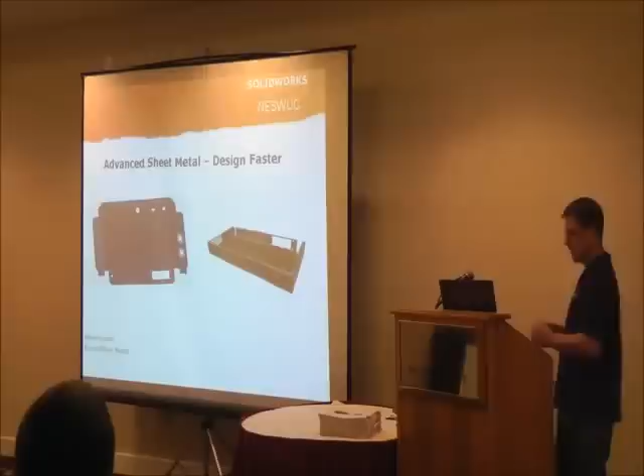All right, so let's begin. I work at a prototype company, which is called Rapid Sheet Metal. What I'm going to go over is some of the common things that we see, and as a manufacturer, we always have to tidy up and fix to prepare a proper DXF flat for the laser, which then can be formed, which then can be welded in a very high tolerance manner.

We dedicate to prototype, so that just means all we mostly focus on is first runs. First runs in the sheet metal industry are very difficult. It's probably the hardest part. Production houses like the repeat parts, that's why you run a lot of 5,001 parts or 1,001 parts, because you don't have to do the setup and the engineering and all the things that we do on a daily practice.

Excuse me. What? You're going to do some pertinent? We do at the end the pertinent stuff, but I'm gonna go through this pretty quick. We're gonna make this available online because there's a lot of step-through procedures, but I always like to cut through to the end and show you what it does, and then maybe go back into detail if you guys want more detail on it. Basically, I'm going to show you a lot of different things that I really find interesting, and hopefully my goal is that you guys all walk away using one of these new techniques. If I do that, I'll be successful.

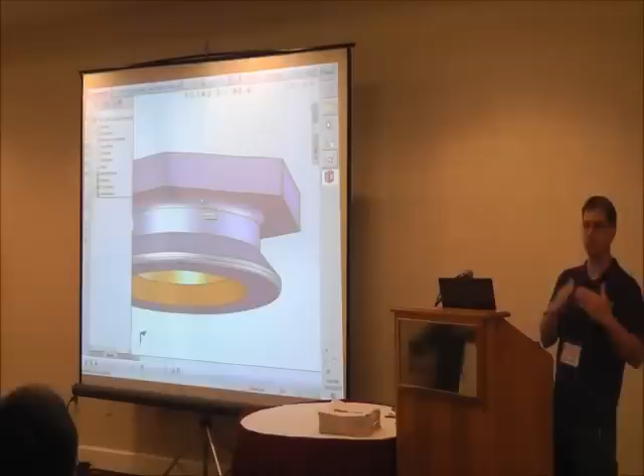The next thing we would go over is flush hardware. Flush hardware is difficult because, as you can see, there's really only one place to get that 90-degree line, and those two planes will be under the flush part. So when you snap this on, it's not going to sit flush. And in the PowerPoint that will be available online, this is very specific and laid out, so you should be able to follow the 3 steps.

This is where we're at now. This is the usual point that we have noticed people choose, and this is the end result of that flush hardware, which really is fine. When you get your actual part, it will not look like that. It will be flush. And again, very detailed three steps on how to get that to sit flush and automate.

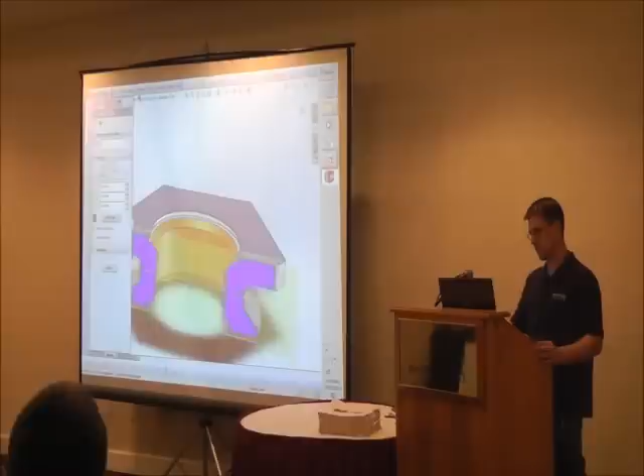We're going to take advantage of this top point. We're going to make a cut sketch, and then we're actually just going to take a sketch from this plane, extend it down, and use the same line in between two 90-degree planes. So as you can see, all we need to do is now put our snap point to this location. Pretty simple, but just a little different approach to how you're looking at it. But again, there's tons of different hardware out there, and you can use this approach to almost any of them.

The other common problem when we open a part, we'll look at countersink through hole sizes. And then another major thing is we have to ensure that the hardware hole size is a proper fit for the hardware inside the assembly. SolidWorks, I really believe this will be fixed soon, but today, if you want to walk out of here with a better solution to finding your hardware hole sizes versus looking at a chart, this is an option that you can do. Again, hardware, PEM hardware, is that commonly used?

Good. And I got a question. Yeah. Toolbox parts, usually they're read-only, they don't modify. You're modifying, right? This is for people without the toolbox. Oh, without the toolbox. And you must have FeatureWorks, and that was my first question. With FeatureWorks, it comes with a toolbox, and a toolbox then, it's pretty interesting. It has one rivet, but it will auto-size to whatever through hole is in your part. So then you have a smaller library, more advanced.

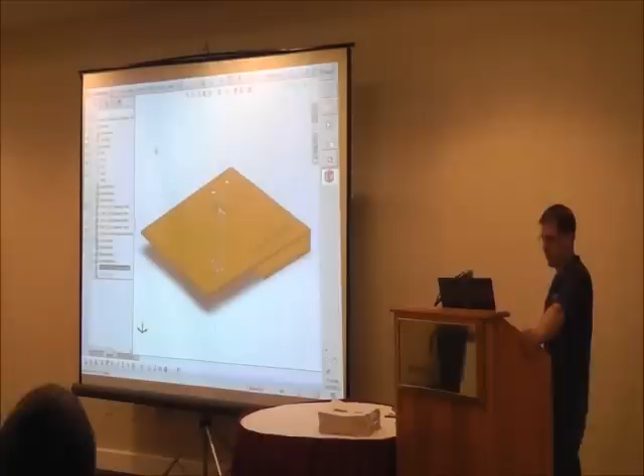After you step through the Hole Wizard modification, you can actually get all that data inside your Hole Wizard. So when we make holes at Rapid Sheet Metal, we can simply pick which hardware we're making the hole for, hit position, create a 3D sketch, and we know we're going to be right every single time. What we also have done is the PEM specs out a .344 plus 3 thousandths minus nothing. Whenever you can, you should always split those tolerances, so we should use a thousandth larger, which is a .345.

Any questions on that, or would you like to see that in more detail? It's definitely more advanced. I think when we get through that, we can do some more things. But again, everything's stepped through, and this will be available afterwards.

This is going to be great. This will get you to be able to use form tools very fast. And we actually did all the hard work, which is coming up with the different shapes for louvers or embossments or half shears or bridge lances. It's always nice to have those features in your design. It's actually very difficult to design something that can be properly manufactured and that's available, that you can go to your vendor and not have tooling cost and add a lead time. We don't add any lead time to anything that you would choose off our website.

This is our website again. Matt Sordillo over here did a great job in designing it. He has this nice interface here. If we come over to tooling, online tooling library, we have this in SolidWorks and Pro E. There is a video that we can go over and I can show you.

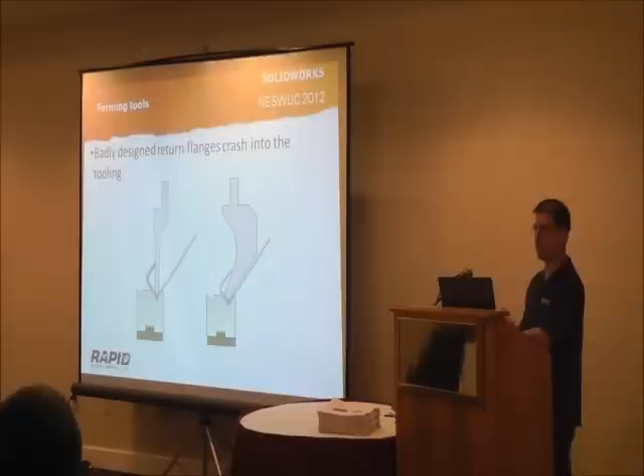This is how sheet metal is formed. These are goosenecks. A lot of time you'll look at this and go, yeah, great, but I don't know what tool you guys have or what standard or how big my return flanges can be. Again, we put that information online. We have standard goosenecks from Wilson Tool that you can download, throw into your part, test your return flanges around and see if it's going to be a clearance issue or not. I think this is really helpful, getting the information that we have available to the guy designing the part.

So here we have a basic part. It definitely looks pretty straightforward, a couple U-bends, but you can see that this gooseneck just is not going to cut it. And all you would have to do is download and install our 3 goosenecks, and then you can go ahead and do this same test that the manufacturer is going to have to do to figure out if you can form it or not.

Basically, if you had some of these, you would see that if we didn't have this back flange on, we could achieve that first bend with, these are Wilson Tool numbers as well, the 40503. I'm almost sure every manufacturer will be able to reference those numbers. If not, they're cataloged and they can get that tool within a day. So this isn't custom tooling. And standard goosenecks, whether it's this exact tool or not, it's going to be this size. They come in 3 sizes, and that hasn't changed in a long time.

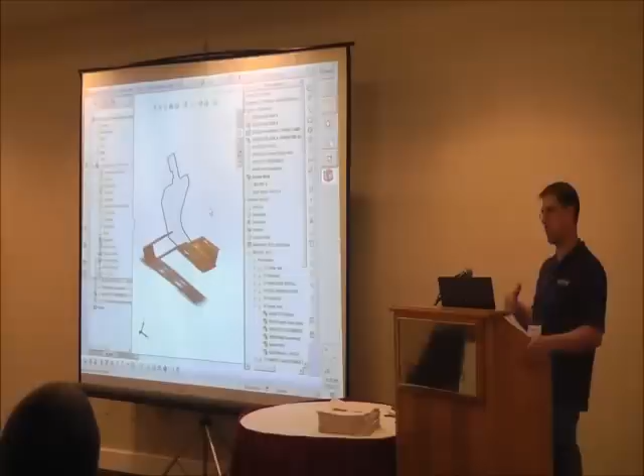So it's a pretty cool trick. No manufacturer wants to know that you know that, but it is possible. Would it be possible in a production run? When you're making a larger run, all these issues really do go away because a custom tool versus your runtime is not as painful. When you're making 4 or 5, you would not want to see the price of a custom tool. When you're making 100 or 200, it would actually save time versus doing this technique.

Any other questions? On your website, do you also have any standards as to, whenever you're doing forming tools, how close you can put them to a bend or anything like that? Yep, it's pretty much on our website. There's a video that actually shows it. I wanted to make it very visible what happens when you do something like that, rather than just giving the rules. And it's called Rapid Techniques.

And here you see some of these forming basics. What happens when a hole is too close to an edge? And it's actually a really cool video. We'll skip through it all, but it will show you what happens. Because how many times have you heard that hole is too close to an edge? But have you really seen it pull? And this is what we show.

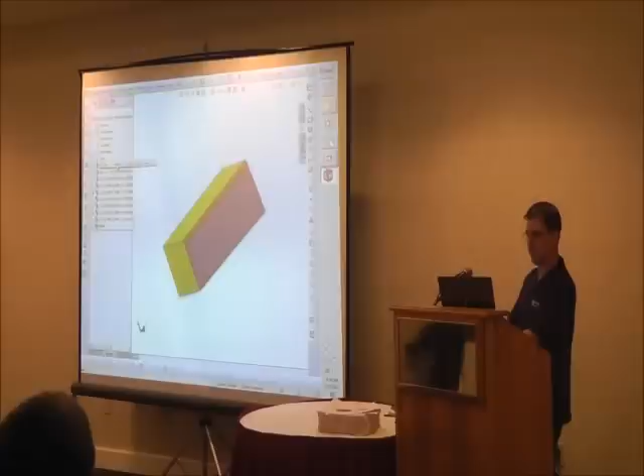If I go to edit this part, you can see that we have the X, Y, and Z as equations. We spit out 3 numbers. Anyone call out a number? 7. And basically, it really doesn't matter.

I can show you that at first it looks like there are rebuild errors, but when you rebuild both parts, they're linked to each other. This would really be beneficial if you're making this design with a bunch of configurations. You wouldn't really have to ever redesign it. Has anyone ever used equations? It's actually not hard.

Basically, when you're starting your part off, you have to do the same stuff anyway. You come to an edit sketch, hit Q. This is what an equation all linked up is. You can simply delete them. We're going to make new equations. That's what this global sign is. If you hit equals, it'll start the equation.

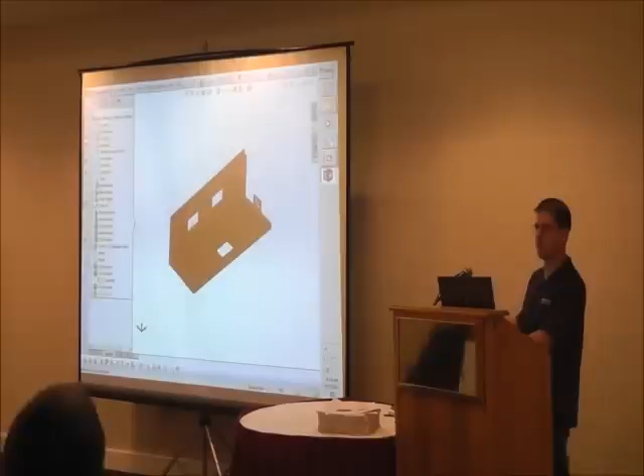I never knew this. If you hold the control button down, you can actually drag this feature. It's interesting. I don't know how much you would use it. I think it would be used instead of blocks or references, but if you had a very complex shape and you want it on another plane, it actually helps you get it to that different plane faster rather than doing blocks and templates and having to resave that geometry.

So we have about a half hour left. Does it seem pretty much right on topic, or?

Question regarding SolidWorks: here's its flat pattern for press brakes, and the bend lines are the center of the radius. Have you ever manipulated it so that you can generate a flat pattern where you use a box and pan brake, so your bend lines actually offset to the side of the radius instead? You can definitely do that. The way that you would do that is take your part to the brake, find out what the dimension was from where you started, and then take that same bend line SolidWorks gives you and offset that distance. So yeah, it's all very possible.

So yeah, 4 minutes left. Any other last questions?

Any issue about modeling a solid, shelling it, ripping the corners, and then inserting the sheet metal feature, versus starting at the base flange and then adding flanges? I'll tell you what, I actually prefer that method. I can whip up some boxes really fast. If I was designing, I would probably do this. This is really the way that it started before.

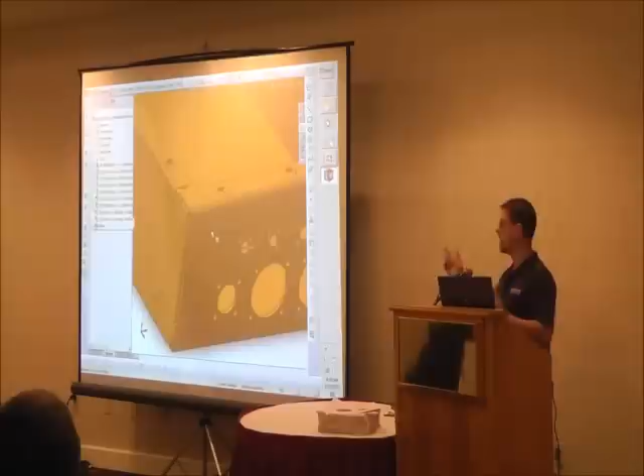So this is basically what we tend to get, and it's great. We can understand the concept of what the designer wants, but this is what I have to train my department to turn that into. And again, you can see that we want to tab everything off and keep that dimension off to the side. These tabs are actually a really cool trick. You can make a library feature that you can then go ahead and edit. So if I wanted 2 tabs instead of 3, they'll all be self-controlled.

Is that a shop preference or a standard user preference? I think it would be a shop preference, but it really depends on the type, if you're doing steel, stainless, or aluminum. As manufacturers, it's just part of the process that we do have to always do to really seal that in. But there's very fast ways of doing that.

And one thing I want to say about SolidWorks is if you find yourself doing the same task over and over, just try and block out some time or ask some questions on how to do that faster. You can learn SolidWorks in a month, but you never stop learning it, and there's so many tricks that you just learn every day.

I think that's... Let's go to 10:30, right? Okay.